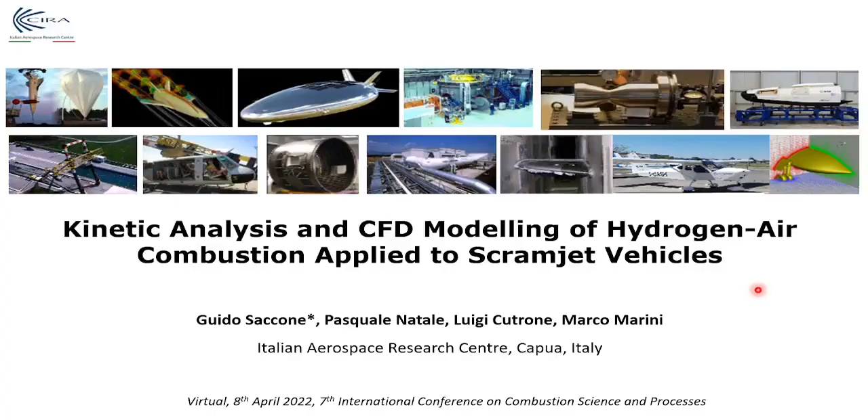This presentation is dedicated to the kinetic assessment, CFD modeling, and experimental validation of hydrogen combustion, especially conceived for supersonic air-breathing scramjet engines. These activities were carried out in the framework of the STRATOFLY project, co-funded by the European Commission under the Horizon 2020 program and pursued by a consortium of several European academic and research institutions, including CIRA, and led

by Politecnico di Torino, aimed to improve the technology readiness level of high-speed passenger stratospheric flight by means of a multidisciplinary optimization approach, and special care was paid to the minimization of both chemical and noise emissions, ensuring at the same time elevated standards of safety.

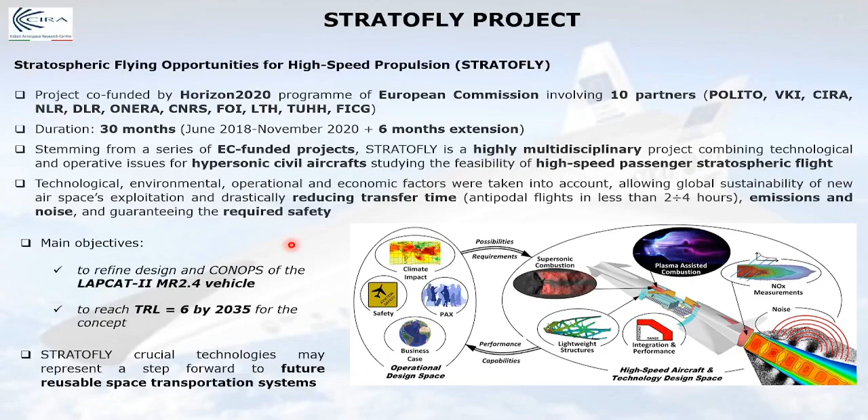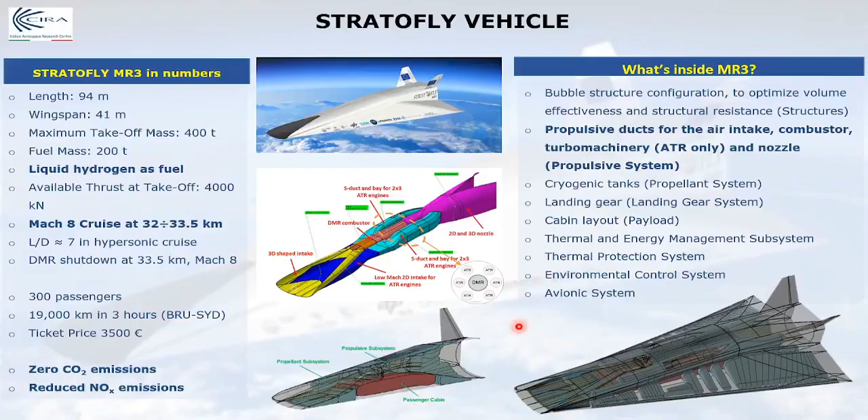Hydrogen is estimated to be a clean fuel, since the overall product of its complete oxy-combustion is only water, even if, when it reacts with air, NOx are also produced due to the very elevated flame temperature reached.

In any case, supersonic hydrogen combustion is a very challenging process involving several complex chemical-physical phenomena, and the operation of a scramjet is further complicated by the very short residence time of the flow within the thrust chamber, that is of the same order of magnitude as the chemical kinetic ignition time.

Since experimental measurement is often unfeasible, design and development of scramjet engines often relies on CFD modeling, and hydrogen-air combustion and chemical kinetic assessment is the first fundamental step.

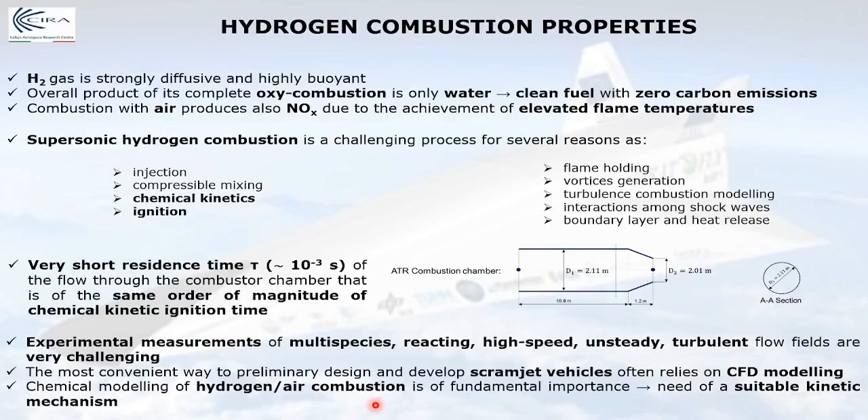For this purpose, several zero-dimensional kinetic simulations were performed using the open-source Cantera tool under a Python interface, simulating homogeneous isochoric batch reactors and solving the fundamental mass and energy balance equations using 3 different kinetic mechanisms.

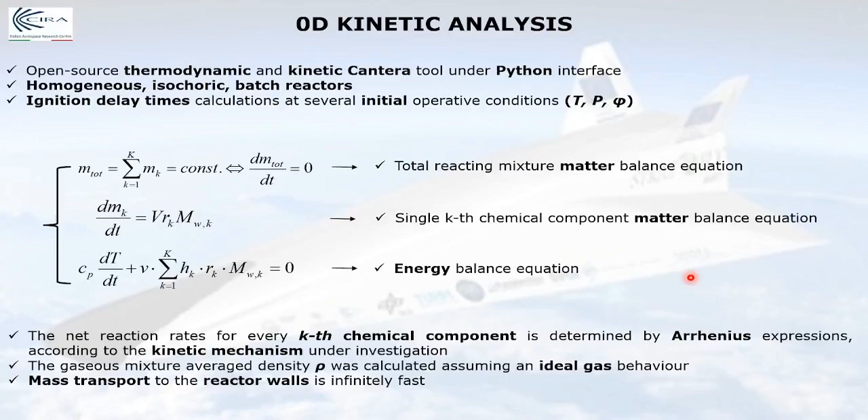The first one was the Jachimowski 1988 scheme developed by the NASA Langley Research Center to describe hydrogen-air combustion up to Mach 25 speed in scramjet operations, and further improved by means of comparison with experimental data in terms of ignition delay times and laminar flame speeds.

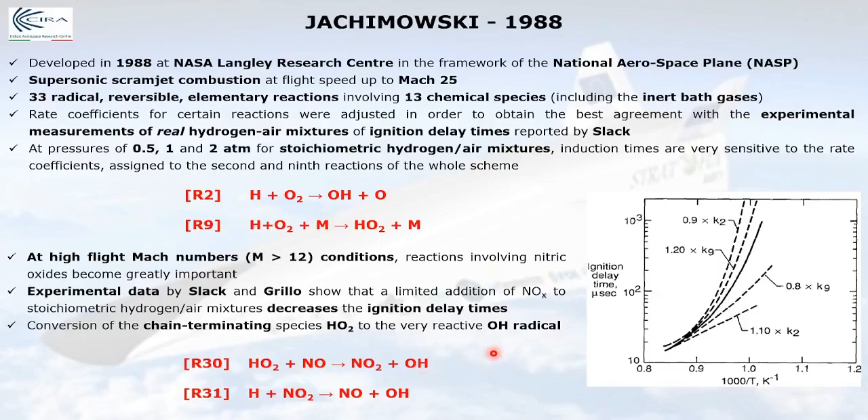The other investigated mechanism was the Kéromnès 2013, originally designed to study the combustion of syngas mixtures up to 70 bar and over a wide temperature range in both fuel-lean and fuel-rich conditions, including also the excited OH radical species, and the authors demonstrated that the reactivity and ignition of hydrogen is mainly controlled by the competition between the chain branching and the pressure-dependent chain propagating reactions.

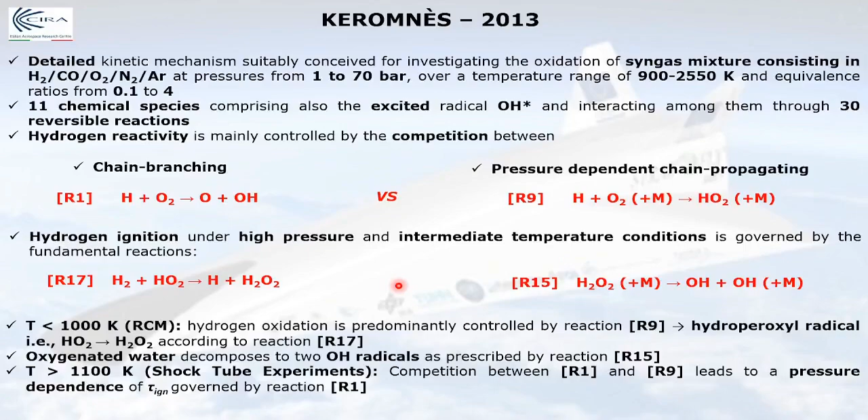At low temperature, below 1000 Kelvin, the ignition is primarily controlled by reaction R9, and the chemical path consisting of the formation of hydroperoxyl and hydrogen peroxide species becomes very important, while at more elevated temperatures, greater than 1100 Kelvin, which are the temperatures most representative of shock tube experiments, the competition is dominated by reaction R1, and in any case, the ignition of hydrogen is very sensitive to the operative pressure.

The third investigated mechanism was the Z25, developed by the Swedish Defense Research Agency, starting from an original mechanism consisting of 22 irreversible steps, plus the 3 fundamental Zeldovich nitrogen monoxide generation reactions, and especially designed, optimized, and improved to achieve a very good agreement between the ignition delay times predicted using this scheme and experimental data in a particular critical zone denominated crossover region, identified in the temperature range between 900 and 1100 Kelvin.

That is exactly the operative box in which several Ramjet, Scramjet, and dual-mode engines operate, studying the competition between the chain branching and chain propagating reactions, and demonstrating also that the reaction R17 plays a very important role, consisting in a thermomolecular decomposition of hydrogen peroxide, leading to formation of the OH radicals that are fundamental flame markers promoting the chain explosion.

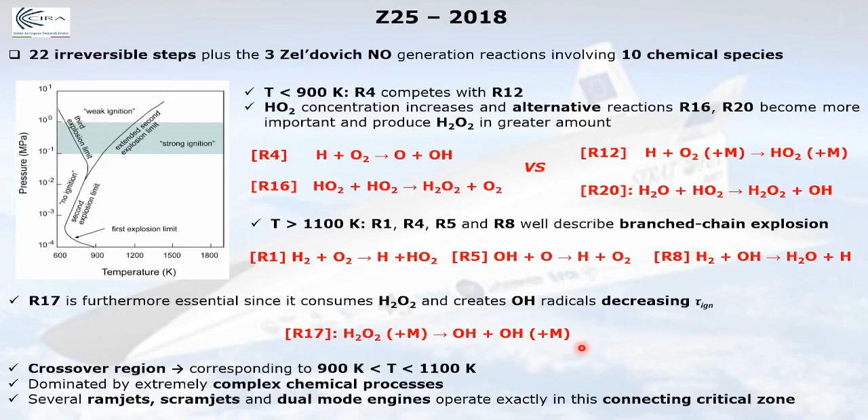First of all, these mechanisms were kinetically assessed by means of comparison between the predicted ignition delay time values, using the same initial conditions in terms of temperature, pressure, and equivalence ratio, and experimental data measured in both shock tube and rapid compression machine test rigs.

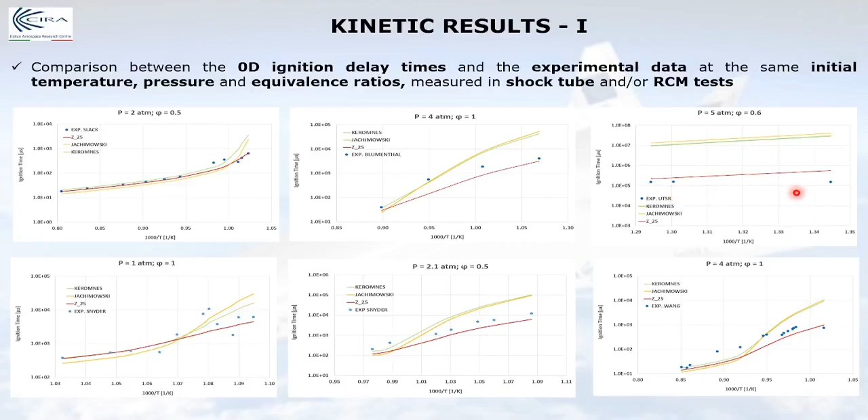As you can see from the plots, while at low pressure up to two bar, almost all the 3 investigated mechanisms provide a very good agreement with experimental data, increasing the pressure, and especially in fuel-lean conditions, only the Z25 scheme exhibits a very good behavior, while the other mechanisms are very far from the experimental data. This trend was also confirmed considering other experimental datasets.

So it is possible to conclude that the best agreement was achieved by the Z25 kinetic mechanism, at least from a zero-dimensional chemical kinetic point of view. That is the only mechanism able to reliably describe the combustion process and ignition phenomena in the crossover region and above two bar of pressure, while the Jachimowski and Kéromnès mechanisms show a satisfactory behavior only at high temperature and low pressure conditions.

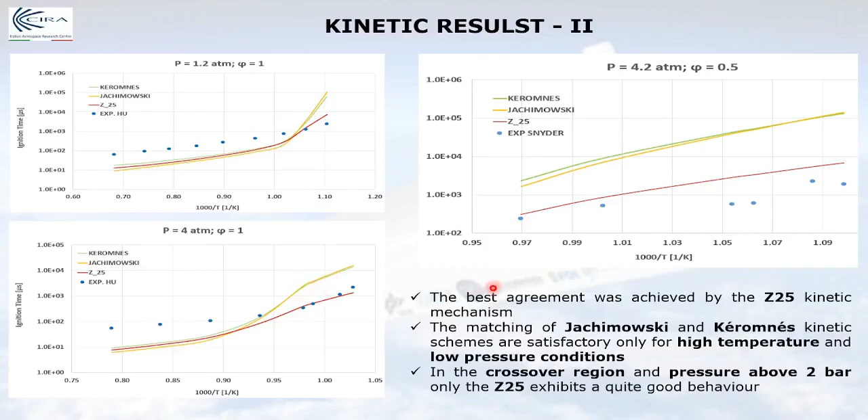Then these chemical mechanisms were implemented in ANSYS Fluent software to simulate reacting fluid dynamic real 3D conditions, and in these plots the temperature distribution in the engine is reported in terms of isosurfaces of 20% mass fraction. These are the solutions obtained using the Jachimowski reduced mechanism with both laminar finite rate and eddy dissipation model as combustion approaches, standard K-epsilon turbulence modeling, and the second order upwind discretization scheme.

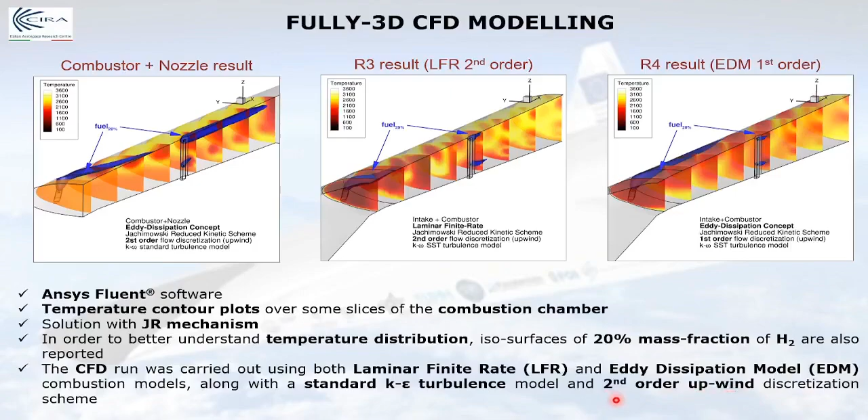Finally, the experimental validation of this chemical and fluid dynamic model was confirmed by means of rebuilding of the ground-based testing carried out at the German Aerospace Center DLR, removing the intake, so considering only the combustion process and the nozzle expansion, starting with an inlet temperature greater than 1100 Kelvin. Despite the unexpected compression and the shift of the pressure profile between the computational and experimental values, the peak pressure determined using both the Jachimowski reduced and the Z25 kinetic mechanism has good agreement with the experimental measurements, confirming that in these conditions, at an inlet temperature greater than 1100 Kelvin, both kinetic mechanisms are reliable in prediction of hydrogen-oxygen combustion.

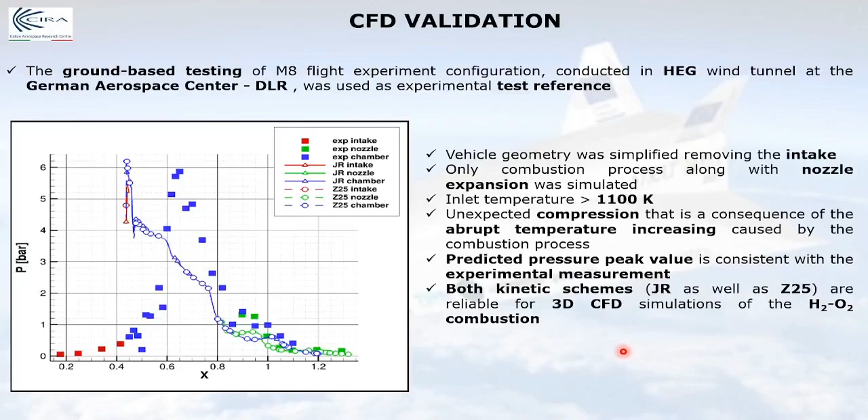So in conclusion, we have studied hydrogen supersonic combustion from both chemical kinetic and fluid dynamic points of view, and an assessment of the most suitable kinetic mechanism able to reliably describe the Scramjet engine's operation was performed, and fully three-dimensional CFD simulations confirmed that both the kinetic schemes due to Zettervall and Jachimowski, at inlet temperature above 1100 Kelvin, are feasible and reliable in the pressure predictions, and the comparison with the experimental data is promising.